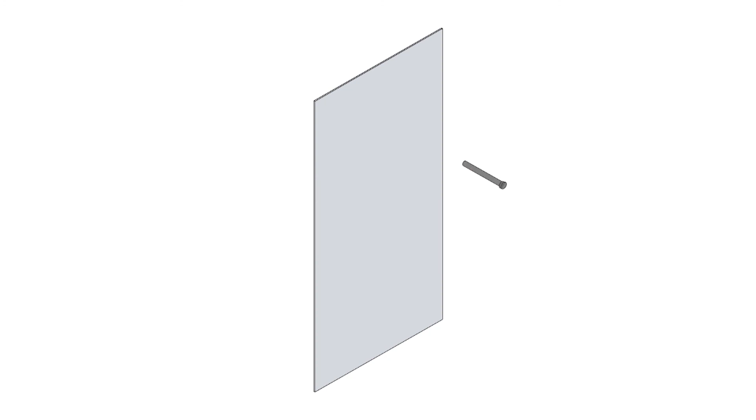SC, or steel concrete composite, is a form of construction made of two steel plates with shear studs and a concrete infill between the plates. It can be used to construct panels which, when joined together, form complete modules.

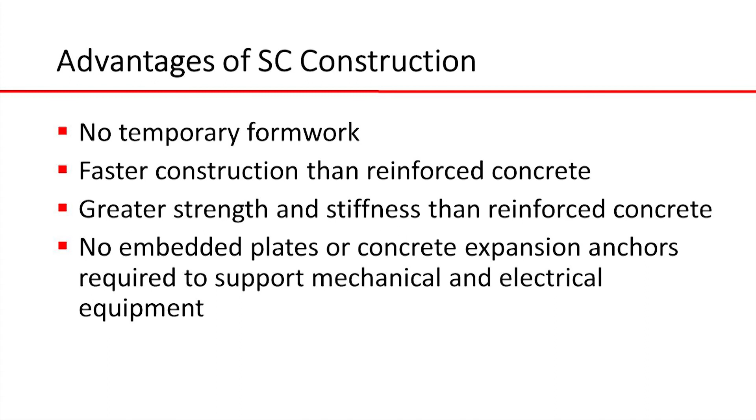SC construction offers many advantages over conventional reinforced concrete, including no temporary formwork, faster construction, greater strength and stiffness. And in industrial applications, electrical and mechanical equipment can be supported on SC structures without having to install embedded plates or concrete expansion anchors. During transportation, lifting and concrete pouring, the two plates must be connected together to form a

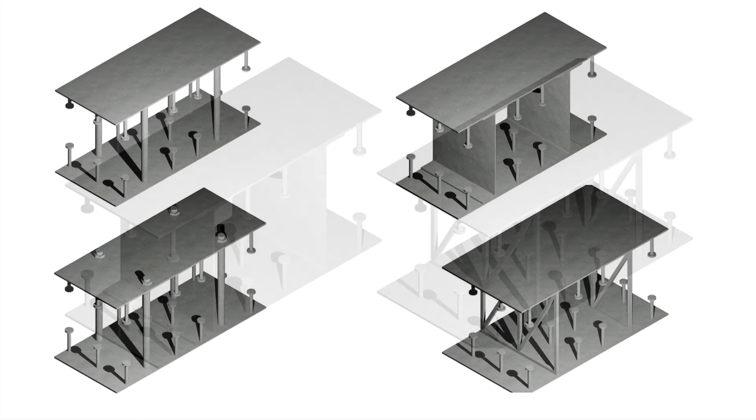self-supporting unit. To achieve this, bars, ribs or trusses, bolted or welded to both plates, have been used in the past. However, welding between the plates is manual and raises issues of health and safety due to the confined space. The steel brick concept was developed by Modular Walling Systems. It is a new generation of SC construction with an integral connection between the two plates.

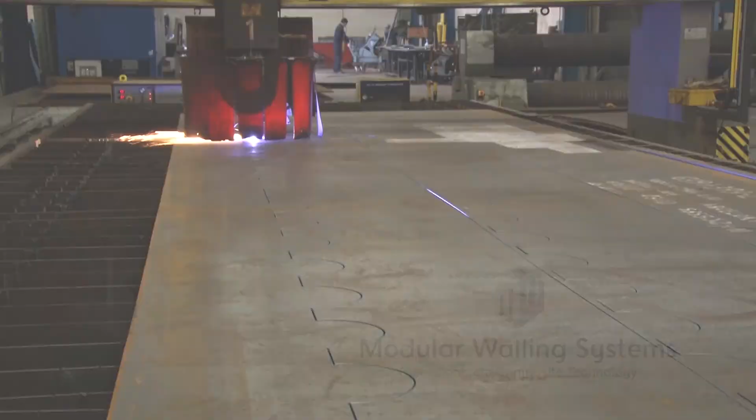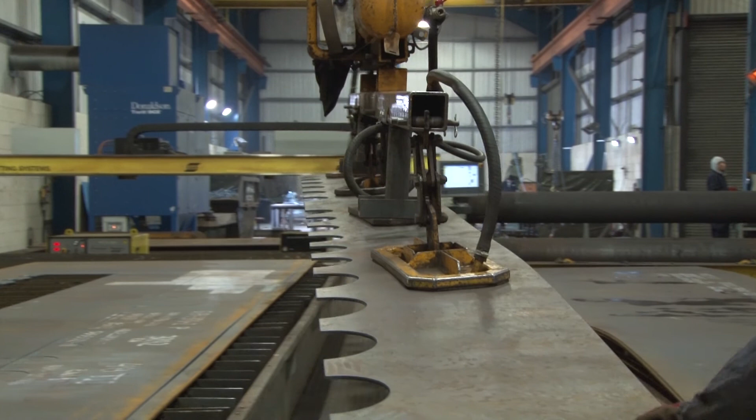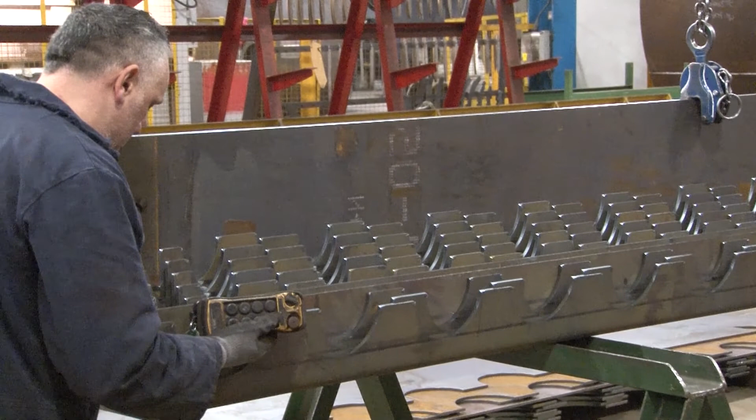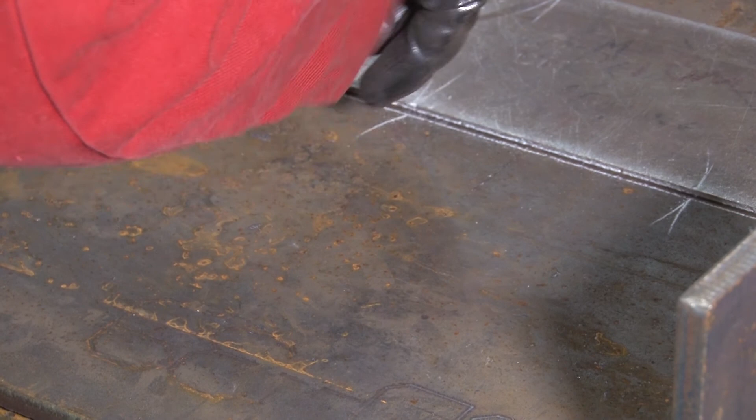The first step in the manufacturing process is a regular pattern of semicircular cuts separated by straight cuts in a flat steel plate. The resulting strips are brake pressed into right-angled L-shape elements. Shear studs are welded to the solid leg of the element.

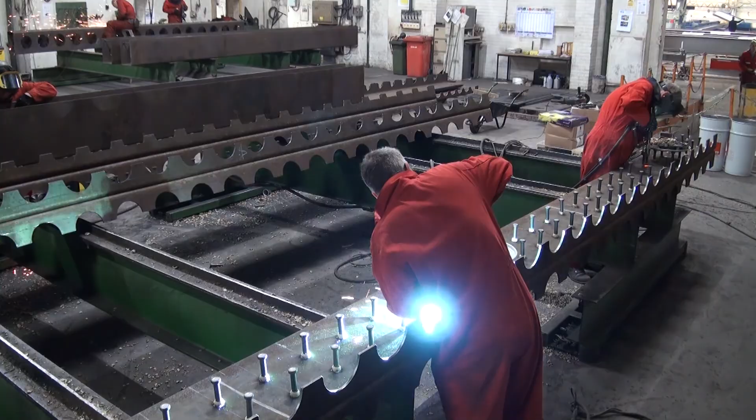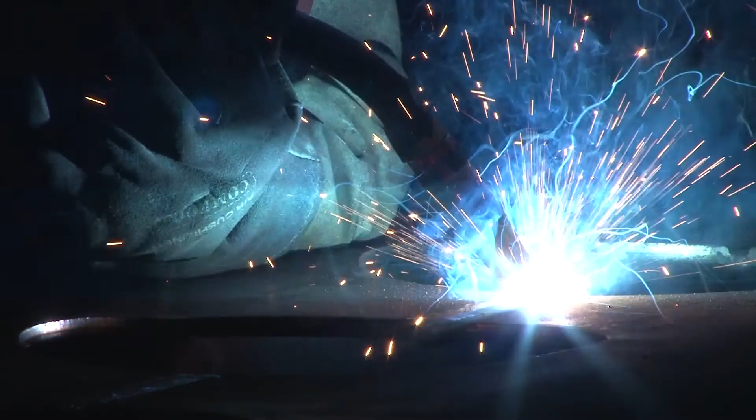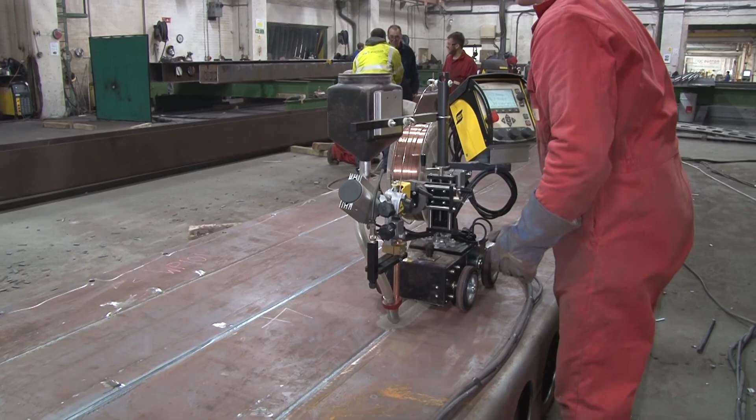A steel brick is made by welding two L-shaped parts to form a U-shaped element. The pattern cut into the plates creates circular holes in the base of the U to allow concrete to flow between steel bricks when the panels are concreted. Modules are manufactured by welding steel bricks together using automated submerged arc welding.

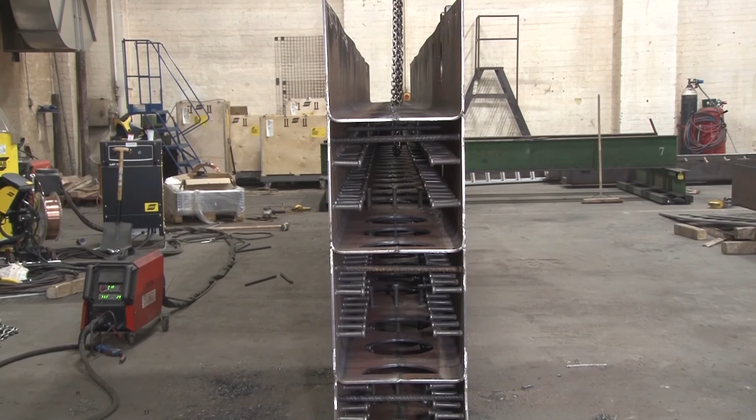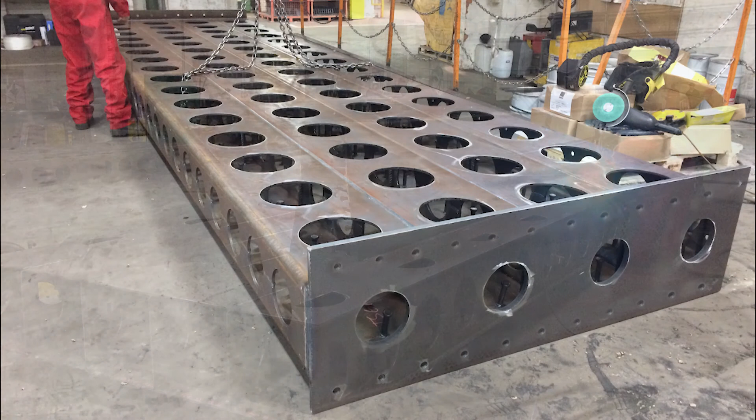Base plates and details for wall-to-floor and wall-to-wall connections are installed in the fabrication shop, leaving the simplest connections to be made on site. In the case of floors, the steel bricks have holes in both the base of the U and in one of the sides, so that the floor can have a concrete finish by allowing the concrete to rise above the plate.

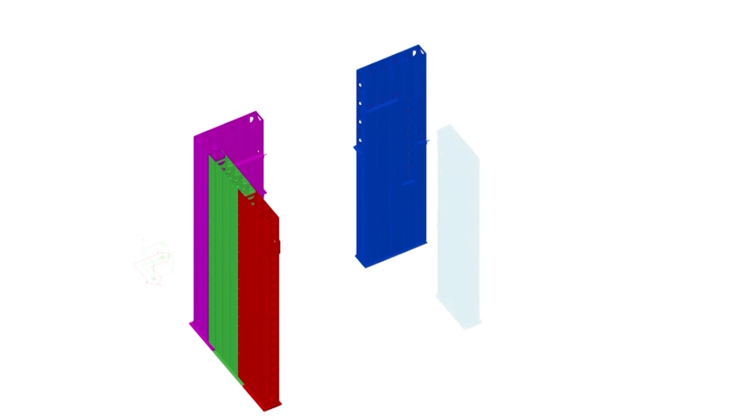To test the buildability of the steel brick system, a full-scale construction trial was carried out. The structure chosen is part of a building which houses diesel generators used to provide electricity on nuclear power generation sites in the event that other means of electrical power supply fail. It was constructed at full scale out of 18 modules. The maximum module size was dictated by road transport restrictions.

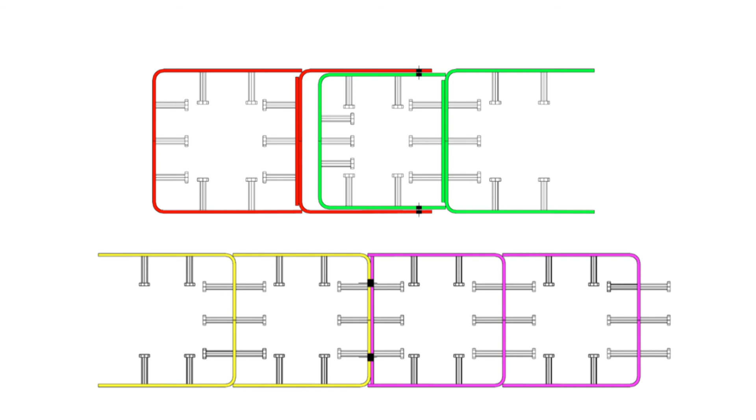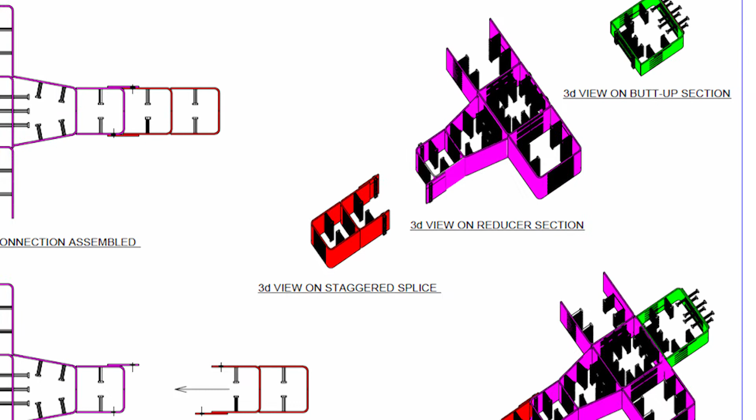Joints between wall modules were detailed to explore a broad range of externally and internally bolted connections, welded connections, and complex joints combining bolting and welding. Bolted floor-to-wall joint details with simple and moment connections were also investigated. This enabled the quickest and most versatile site joining details to be identified.

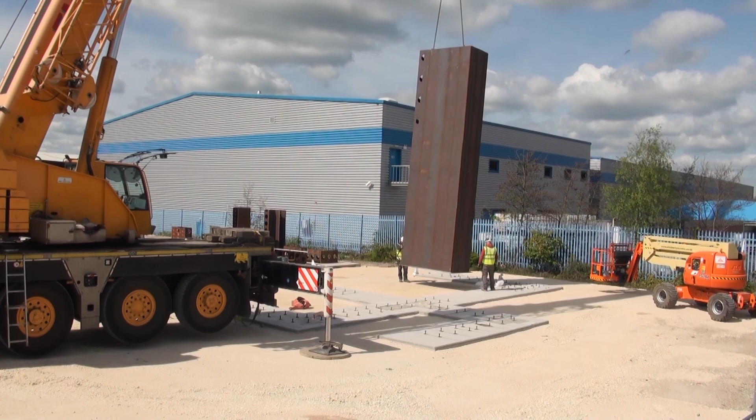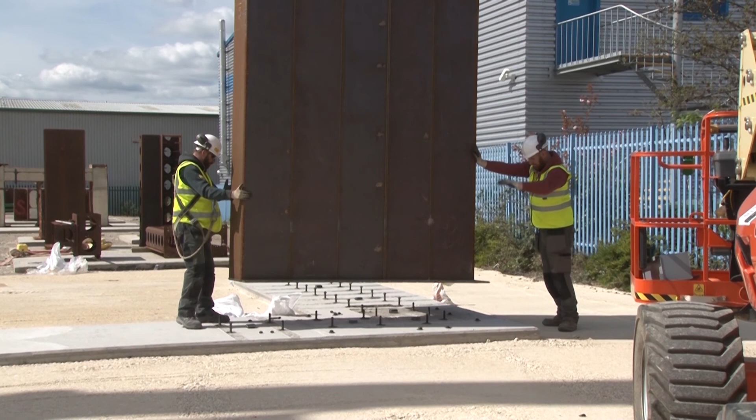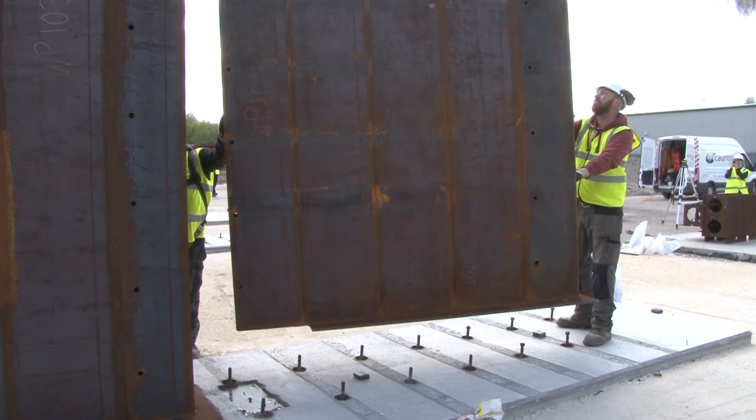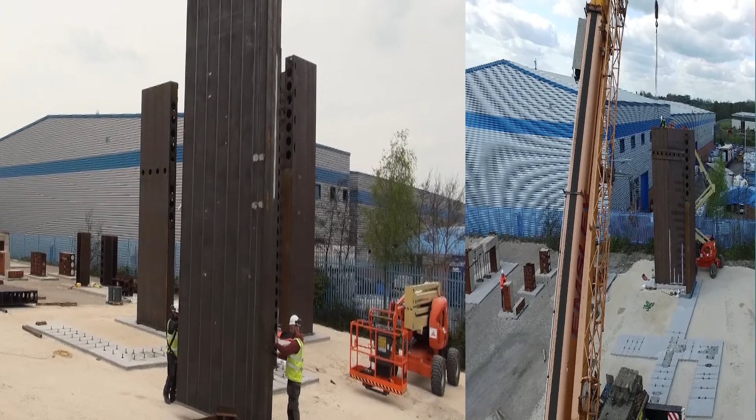The structure was built on a reinforced concrete strip footing. Connection between the wall modules and the foundations was by holding down bolts. All modules were easy to lift and place at their position in the structure and fitted together well.

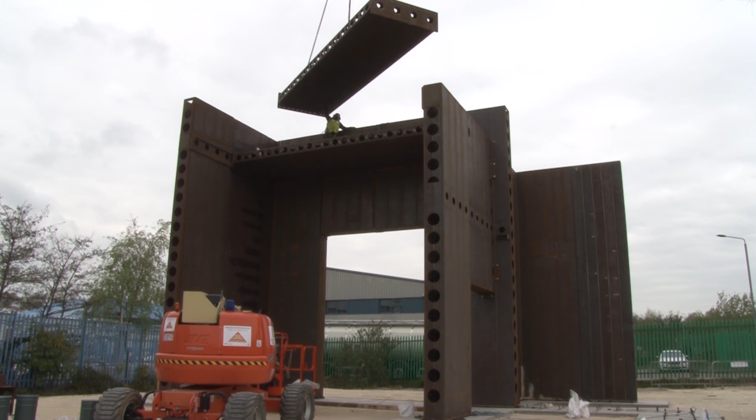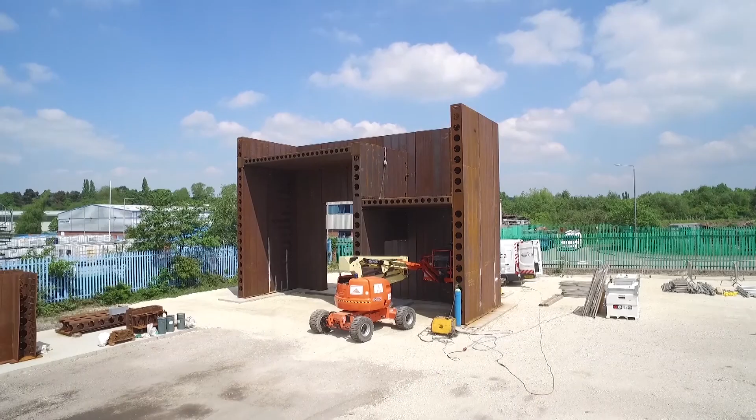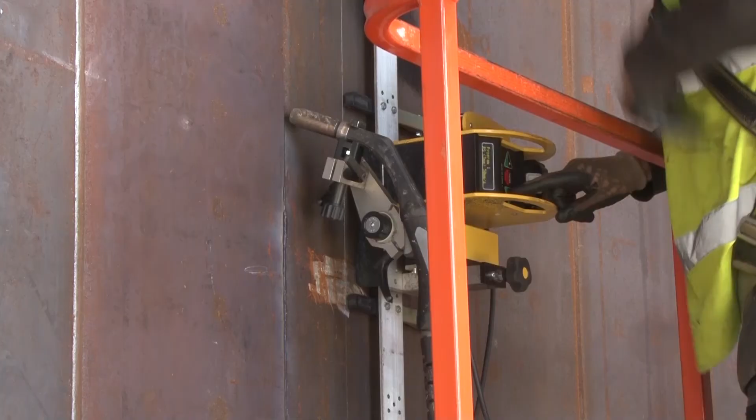Both manual and robotic site welding were investigated. This demonstrated that robotic welding resulted in a significant reduction in time to complete a joint.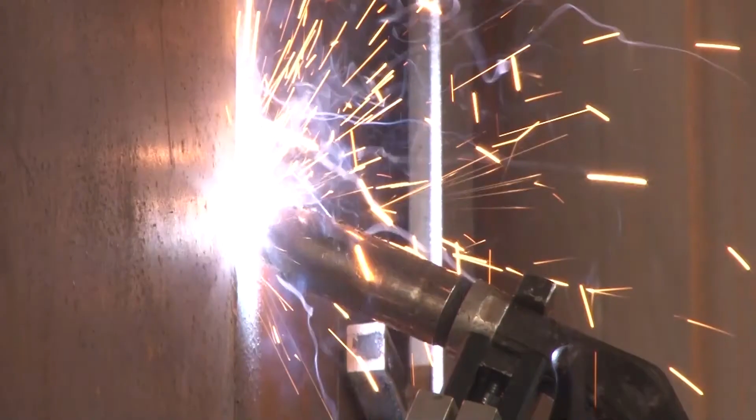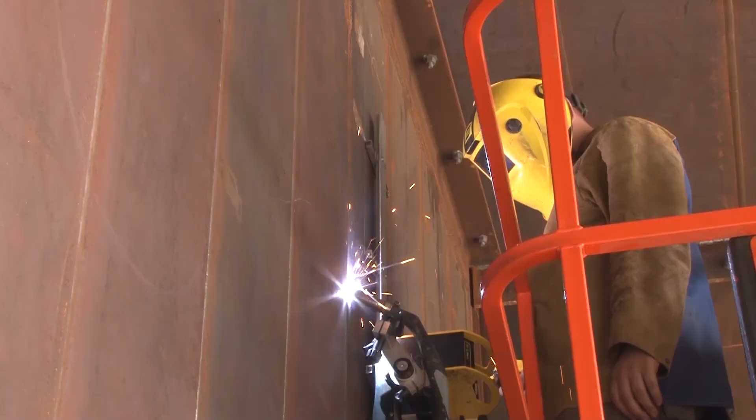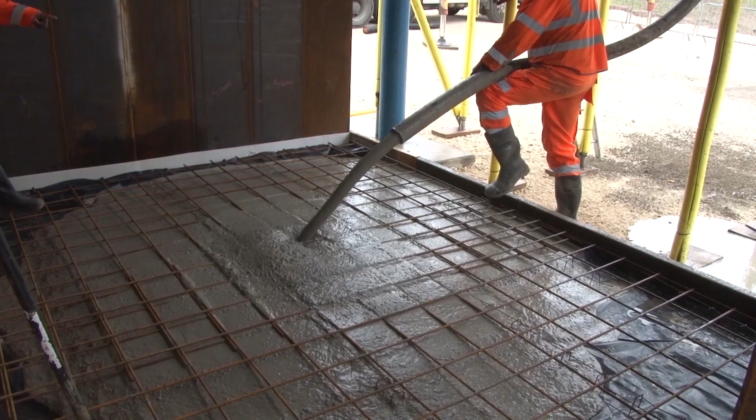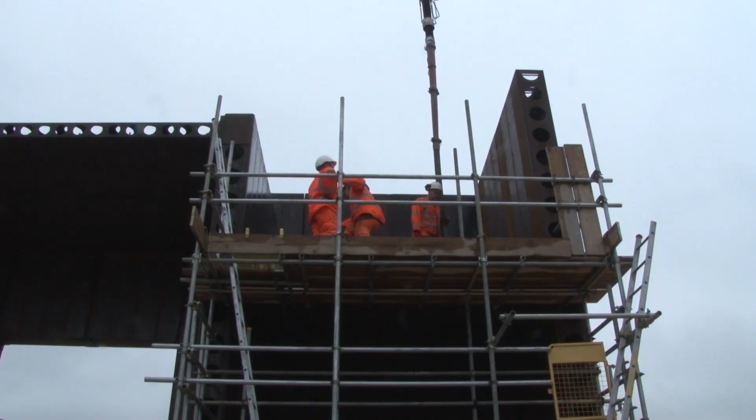The structure was partially concreted using a highly flowable concrete mix. Following curing, removal of formwork at the wall ends revealed a concrete surface with no voids or defects.

The project has enabled an innovative concept to be developed into a new construction product. We now have the confidence that steel bricks can be used for faster construction of core walls in buildings, retaining walls, and for industrial structures such as in nuclear power plant and small modular reactor buildings.